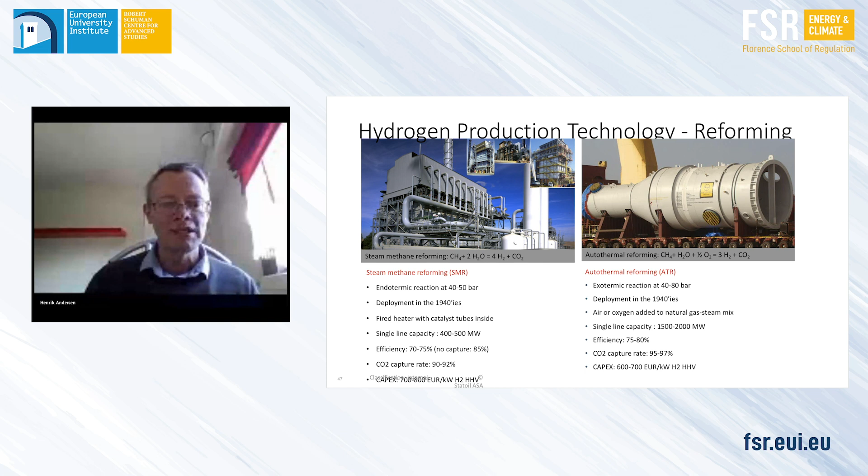Next is, Europe is really a world leader in that space. It's really the legacy from the early 1900s, where the chemical industry developed in Germany, France, and UK. And you see a famous guy on the right hand side, that's Fritz Haber. He's also known from the Haber-Bosch process of producing ammonia. But in fact, he also patented some of the first SMR concepts in the world when he worked at IG Farben. BASF took the first patent on the nickel catalyst, that is the key catalyst in reforming hydrogen. And the first SMR was in operation in the UK in Billingham in 1936.

When I say Europe is world leading, if you look at the supplier space, there are about 8 key suppliers of SMR and ATR, and 7 of these 8 are from Europe. So it's Air Liquide from France, Johnson Matthey from Europe, KBR is US based. You have Linde, Technip from France, ThyssenKrupp, Haldor Topsoe from Denmark, and then Amec Foster Wheeler, or Wood today, from the UK. So you have really a competitive edge when it comes to reforming natural gas. And it's quite interesting to see. It's not an area where the Asians or the Chinese have taken any space. And I think that should maybe be recognized a bit more, that you in fact have that key position already in reforming natural gas to hydrogen.

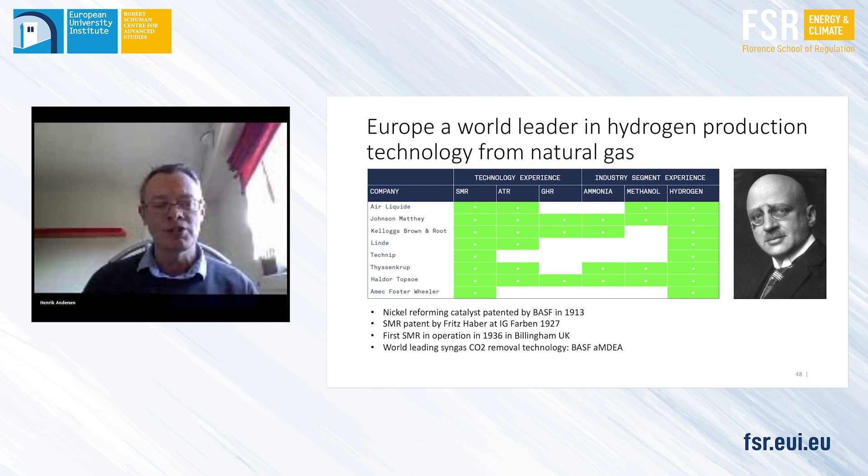A key component is of course CCS. Equinor has run, I would say, still the only CCS projects in Europe. The first one was Sleipner, almost 25 years ago, and then Snøhvit 12 years ago. We're now working on a new project called Northern Lights, starting with some industrial CO2 sources from the east coast of Norway. But the project is developed as an open source CO2 T&S. And we work a lot with the European industry to link up to that store. And that's been a really key enabler for European industry that can't do either hydrogen or electrification. They only have CO2 capture as the option to decarbonize their industry.

What's not shown here is that we're also involved in the UK, in a project called Net Zero Teesside, where we work with partners BP, Eni, Shell, and Total to develop a CCS project, and that also comprises a CO2 store called Endurance, which is a huge aquifer containing up to 400 million tons of CO2. People are talking about the potential of CO2 storage in the North Sea. The work we are seeing done in Norway and the UK shows the potential to store maybe up to 100 to 150 gigatons of CO2 in that area, which shows it plays a key part in potentially meeting net zero for Europe, using both blue hydrogen and CCS.

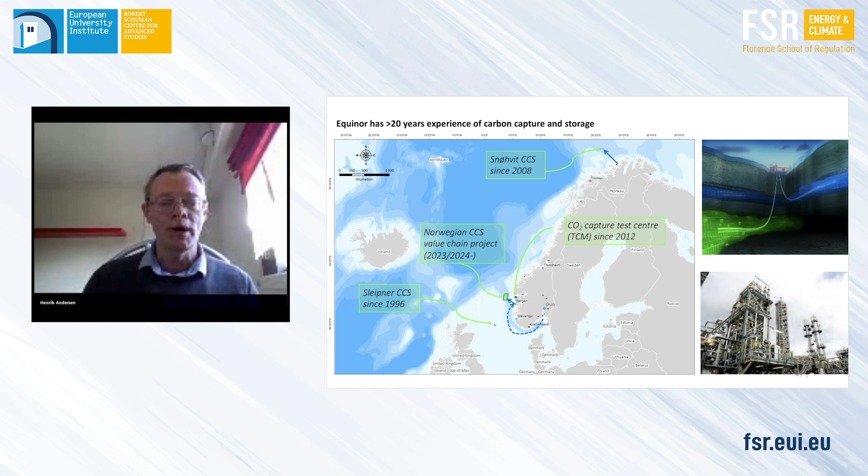A small case study we did, because there's a lot of discussion when we introduced blue hydrogen about gas lock-in and upstream emissions. If you take a classical blue concept with an ATR and CO2 capture, you need some power to run the air separation for oxygen. We have around 75% efficiency, and that needs to be compensated with more natural gas. So to deliver 75 terawatt hours of hydrogen, you need 100 terawatt hours of natural gas. And that means countries increase their gas dependency. So Equinor has looked quite a lot at how we can reduce that gas dependence and still make our concept not a stranded concept.

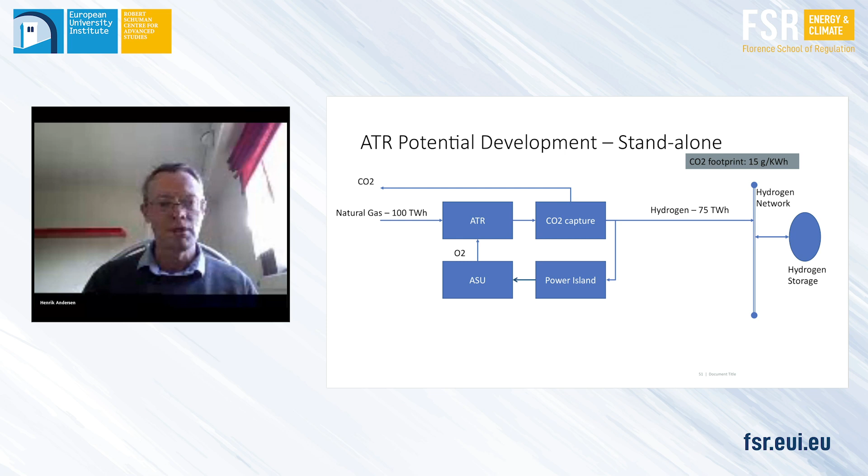What we see is that the first step is to electrify more of the concept. We can electrify the fired heater, we can do more advanced reforming. So we are now using more electricity, which will ultimately be a huge portion renewable, backed up with hydrogen-based flexible power. So we reduce the natural gas consumption by 20%.

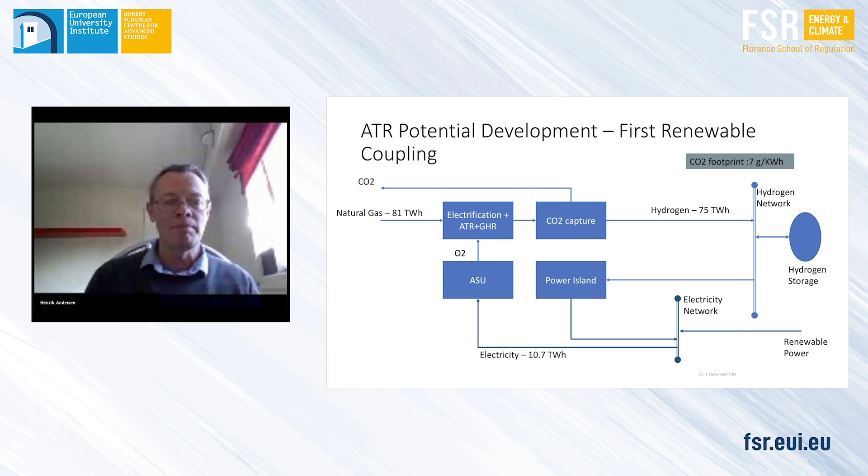The next part is adding in biogas. A lot of countries in Europe, Germany, UK, France, etc. have a lot of biogas available. And ATRs and SMRs can use biogas same as natural gas as a feed source. So we look at, and you can find it in these Element Energy studies, adding in 20% biogas, and by that we are again reducing our natural gas consumption even more, so 20% more.

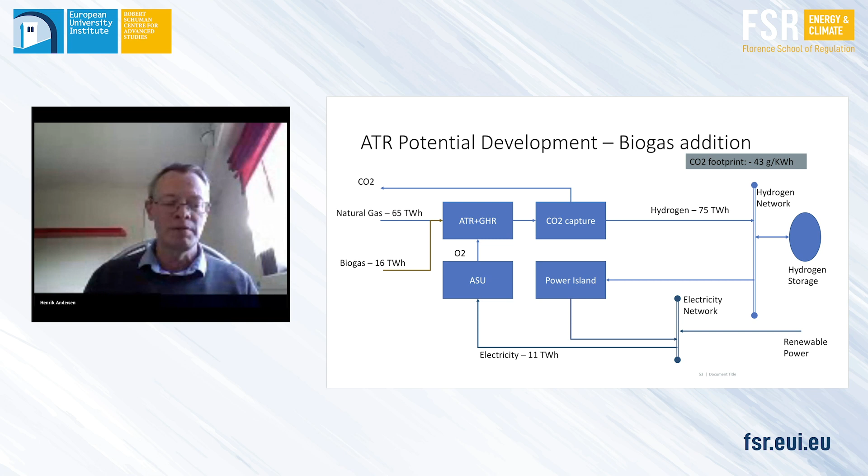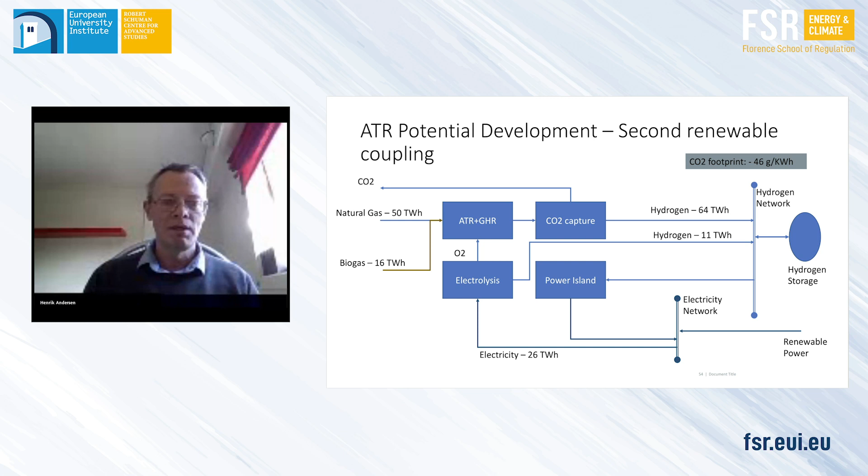And then we can look into electrolysis, using electrolyzers also as an oxygen source to the ATR, getting more green electricity into the concept and reducing natural gas. And then we can move on, and the final step is more electrolysis and more bio, and at the end you will not have any natural gas, but you still have the original investment in both ATR and CO2 capture, water gas shift and so on.

It's not a stranded asset. I think that's really a key message, that we can transform the blue hydrogen concept into green, and will not end up with a lot of stranded assets and wasted investments. So I think this case study illustrates that.

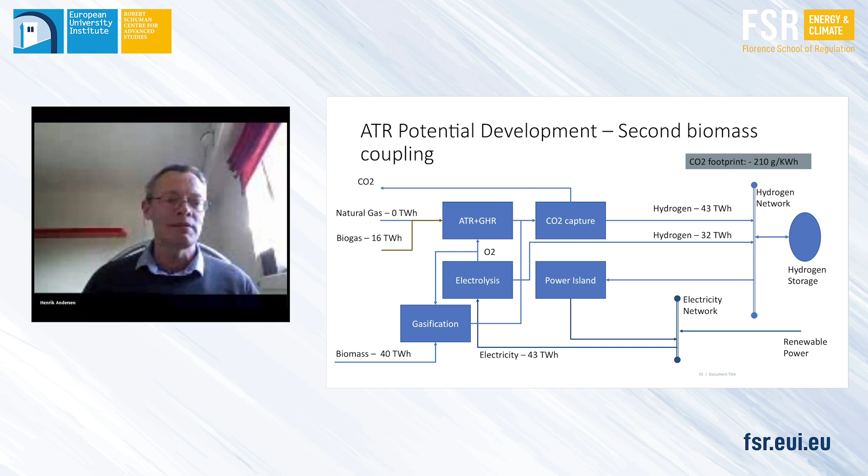And I would say there's a lot of discussion about green, blue, pyrolysis, and cost comparison. I think that's very interesting. But I think from Equinor, we are a bit beyond that. Our key focus is how do we develop the hydrogen market? How do we work with power producers to convert their natural gas-based power stations to hydrogen? How do we work with industry to convert their boilers and heaters to hydrogen, and so on?

So I think that should be a much higher focus, instead of having this almost competition between different ways of producing hydrogen. There's no need for this type of competition if we don't have a market. So we need to create the market first. All technologies will play a role, so let's create the market. I think that's my final statement.

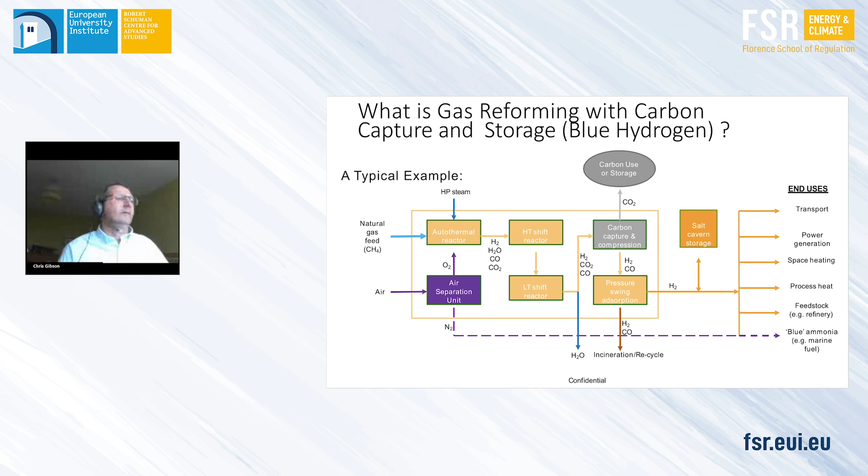And I'd just like to finish on some examples where you could apply blue hydrogen, because blue hydrogen is going to play an integral role in creating what we call clean energy parks or clean energy systems, also known as industrial clusters in the UK. There's one being developed at the moment in Teesside, which is an OGCI concept that BP's leading on. So that one's moving forward, and in fact they've got post-combustion capture as their anchor project.

But if you look at where hydrogen could play, you can see here that blue hydrogen is integrated across many different clean energy systems in these clean energy parks. So the hydrogen itself, and that could come from green or blue or a combination of, can provide heat for homes and industries, fuel for power and transportation, feedstocks to other chemicals. So it's a great way of interacting and encouraging new industries.

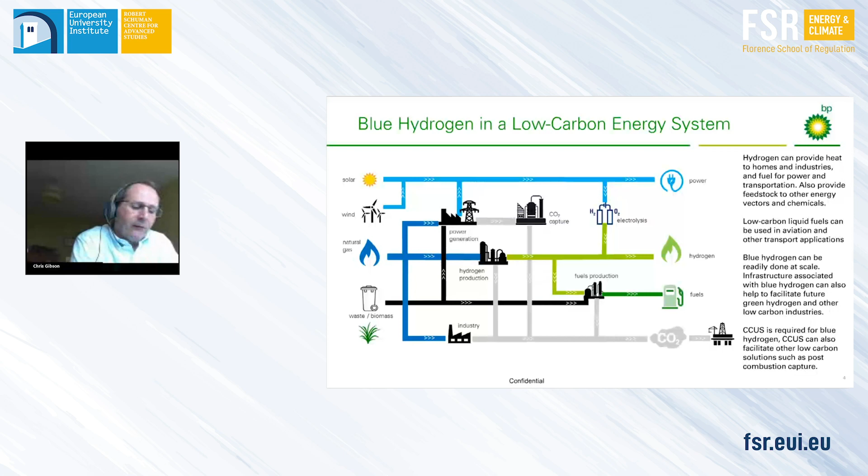We firmly believe blue hydrogen can be readily done at scale today, but the infrastructure associated with blue hydrogen can also help facilitate the future for green hydrogen. And CCUS can also facilitate other low-carbon solutions such as post-combustion. So if you've got blue hydrogen infrastructure in place, it means you've got also CCUS in place, and that can encourage post-combustion technologies as well. So you can look across many industries to see what the optimal solution is, with an anchor being blue or post-combustion to get these industrial clusters moving.

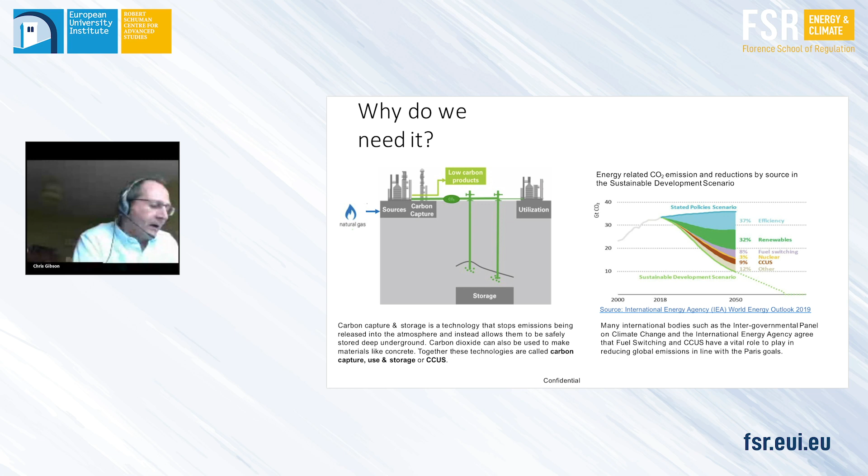So we see hydrogen as a complement to electrification. We see blue hydrogen as an essential long-term pathway for decarbonising natural gas. It's the most likely economic source of clean hydrogen at scale in the short term, but we see scope for both green and blue hydrogen going forward. And whatever type of hydrogen, it's going to be specific to whatever is available in the region. And that could be cheap renewables, it could be CO2 storage, it could be availability of land or policy.

And the infrastructure from blue hydrogen is great for facilitating other solutions. So we see that certainly leading into green hydrogen. So I'd like to leave you with that thought that there's not one particular solution that's going to fit all cases. We need all these examples, but what we can do today is blue hydrogen, and it will help facilitate other industries and other clean-up solutions.